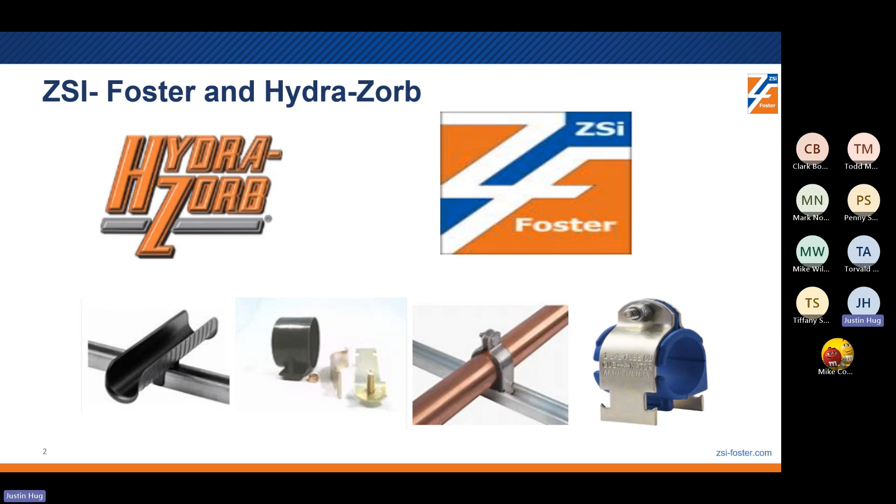They kept both names, although they approached the market a little bit differently. It made sense to keep both in the market under two different names, but as far as production and everything, it did move into one facility. So they had a couple good years, and it allowed them to move forward and really shift the company into purchasing Wesanco Strut, which is out in California on the West Coast. Then in 2019, they purchased Florida Strut, which is obviously down in Ocala, Florida. And then the third acquisition was Versabar, another strut manufacturer up in the Northeast.

So now you have a clamp company that has three different brand strut manufacturers, strut mills in the United States, with no real footprint in the Central. Although our brand is very, very good and well known, the Hydra-Zorb name is probably the best known. We are kind of shifting gears and trying to focus our marketing around one strut name and one clamp name.

It'll have a state-of-the-art strut roller mill. That mill will have very, very quick changeovers in die and tooling, so it'll do slotted, not slotted, long slots very quickly. It'll also do cut pieces very quickly off the mill.

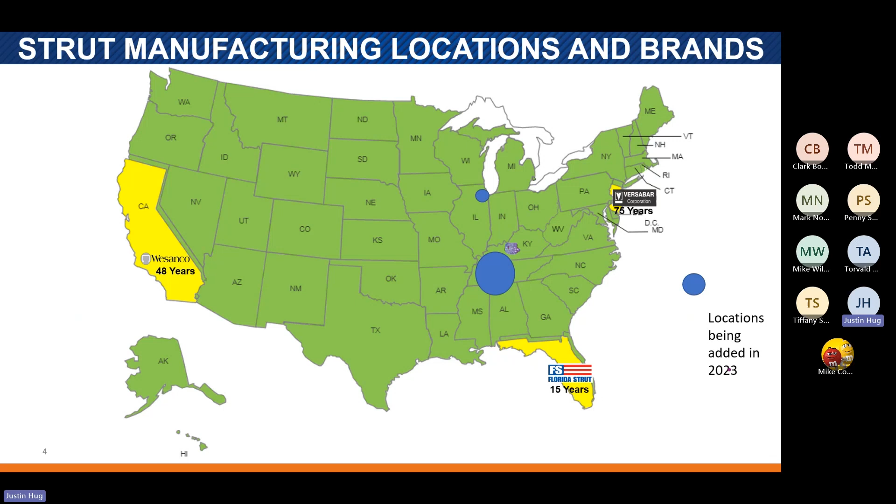We're still going to have ZSi as a name for the clamps, and Hydra-Zorb. Those are the names that you guys are using every day. But for the strut part of the business, we're going to go with the brand Wesanco.

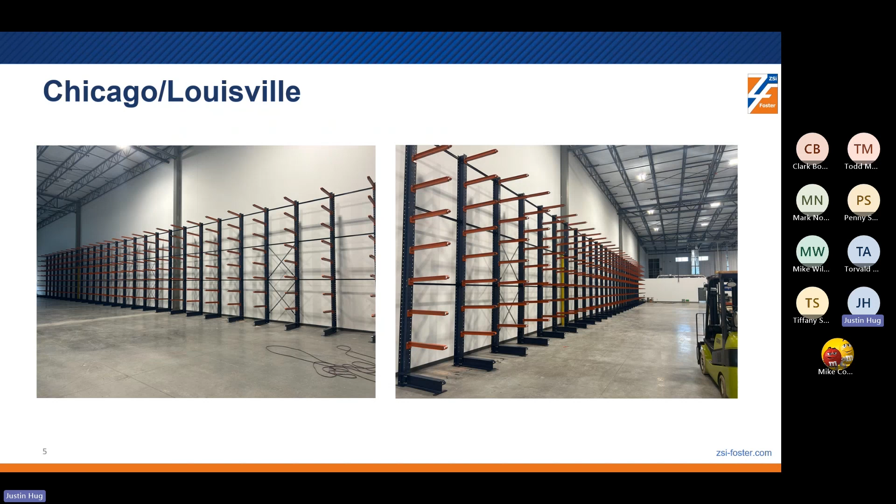These pictures are a little bit old now, but these are a little bit more exciting, taken about 2 months ago. These are the strut racks that we put up in Chicago. Louisville is very similar, obviously. I mean, those are massive, massive racks. So we put a ton of inventory, a ton of investment in there to help service the central.

Basically, everything that PM touches, these locations will definitely help service distribution in those markets. As you can see, we kind of pulled Florida Strut off that for a long time in my slide deck in the Carolinas, Alabama, Florida. That would have had the Florida Strut name. Definitely Wesanco is taking over, and that will be our strut brand name moving forward.

The Northeast still is Versabar, but we're hoping by January 1st that will be Wesanco as well. So when you're purchasing your clamps, your ZSi, your Cush clamps, Cush-A-Therms, know that the brand of strut that we will be selling to go with it is Wesanco.

I like to start off with that because there's a lot of confusion around who we are, and it's growing pains, right? As we've added these companies, it's definitely been a work in progress to kind of go to one name, one catalog, one part number. It sounds easy, but there's a lot of stuff in the background to make that happen. So it's good timing, crazy timing for us and growth, and we're looking to attack the market that way.

So why Wesanco and ZSI? We offer strut, channel strut accessories, rooftop supports - we'll talk a little bit more about that. We have a nice full line of spring steel fasteners, and we're getting ready to do some investments in there as well. Electrical raceway systems, full line of cushion clamps and insulating clamps and vibration pads. We do those very well.

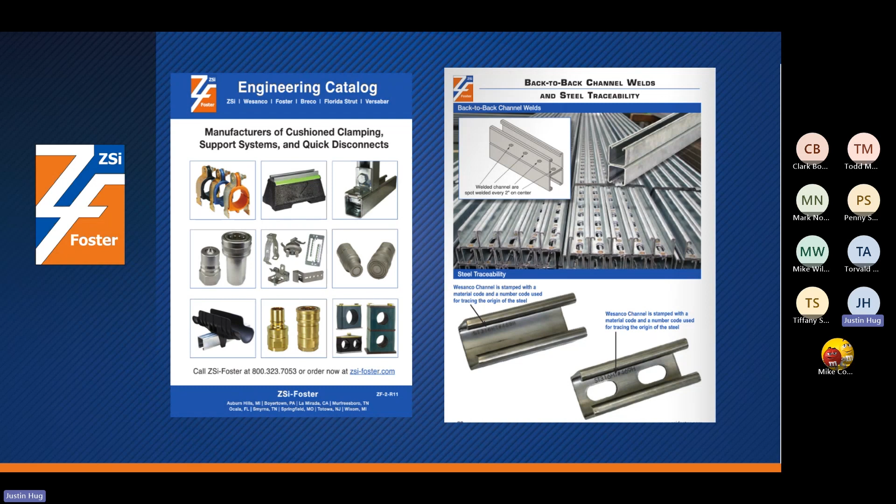That gives us a leg up on nuclear projects, some government type stuff. I mean, it is very, very important. I probably wouldn't have come to this company if they didn't do that. Really good strut providers do that. We compete against a lot of guys with import, low price stuff like that, and I can tell you that contractors, certain projects, this is a big deal to have that. And it's a big quality thing too, and accountability thing in the material that you're using. So we definitely do that - we check that box.

All the different flavors, if that's what you want to call it - your standard inch 5/8 deep, right? Everybody's going to have that. We do very well on back to back.

3 1/4, 2 7/16, 13/16, all the different heights, all the different combinations, side by side, back to back. We offer all of that, deep, shallow, mini. We have everything. We have knockouts, long slot.

It's a full breadth of product. And one thing I want to point out, at the right of the screen, is that we do something a little bit different: we actually catalog our pre-cut strut. We have existing part numbers, and we stock a lot of the common sizes, like in the inch and 5/8. We stock 1 footer, 2 footer, 3, 4, 5, and then it jumps to like 8. The part numbers are already made, and we typically keep 100 to 200 in stock just for when guys are in a pinch.

The big deal with the pre-cut is, if you have a contractor on site cutting strut anyway, buying 10 footers, 20 footers for big projects, you can target them. They're paying a guy to stand and cut that strut down to the trapeze size they need, 2 footer, 3 footer. They're going to cut it up anyway. There aren't many projects that actually install a 10 or 20 foot piece—they're all cut to size. So this brings a little bit of value. We get a premium, and you guys get to sell it at a premium.

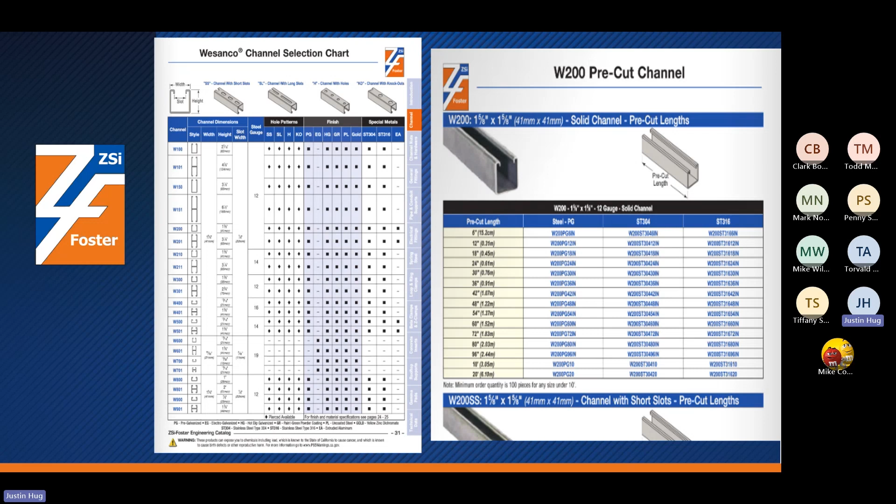We also offer all the different materials as well. We have stainless steel, 304, 316 on strut, fiberglass, green. A lot of guys still use the green. We offer green, we can do it in plain. Believe it or not, people doing painting or certain finishes don't want a finish on it, so we'll ship it in plain, or your everyday pre-galvanized. So all the different flavors.

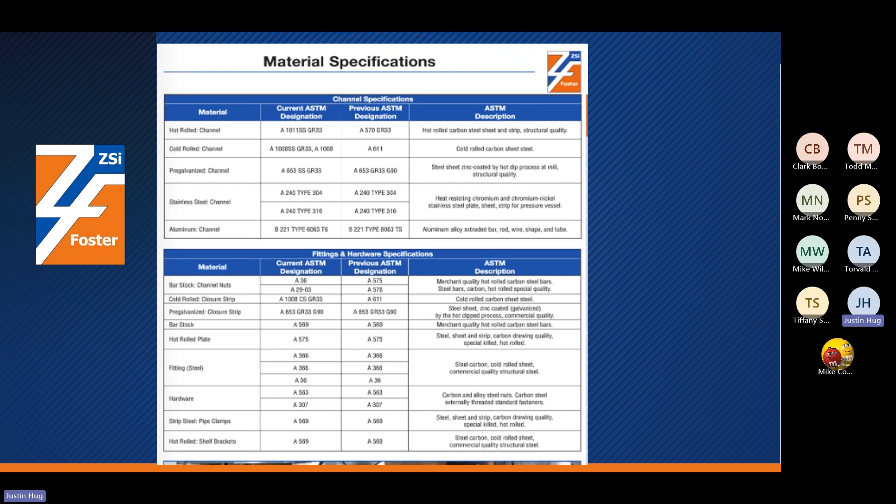And it goes for fittings too. Typically the fittings we have can match whatever flavor of strut you want. If you want green strut, green fittings, we can do that. If you want hot dip galv strut, we have hot dip galv fittings, and so on. Pretty powerful bandwidth of material.

We talked about the strut a little bit—we're the world leader in cush clamps. I'd say we probably own 80% of the market when it comes to cush clamps. We private label for 43 different companies. Typically, if you're buying a cush clamp, say from XYZ, we probably make them in Michigan, private label them, bag them, and ship them out. It's probably a high percentage that it's one of our clamps, rebagged private label.

So we're very, very good at cush clamps. We also have a big, wide variety of fittings, a full line of strut fittings—I know that's very important—utility brackets, and all the hardware: strut nuts, stud nuts, twirl nuts, all the different fasteners. Even down to different bolts, standard nuts, square washers, everything, we offer it. Specialty items too, I'd say rollers, concrete inserts, trolleys, and some cantilever brackets—we have that as well.

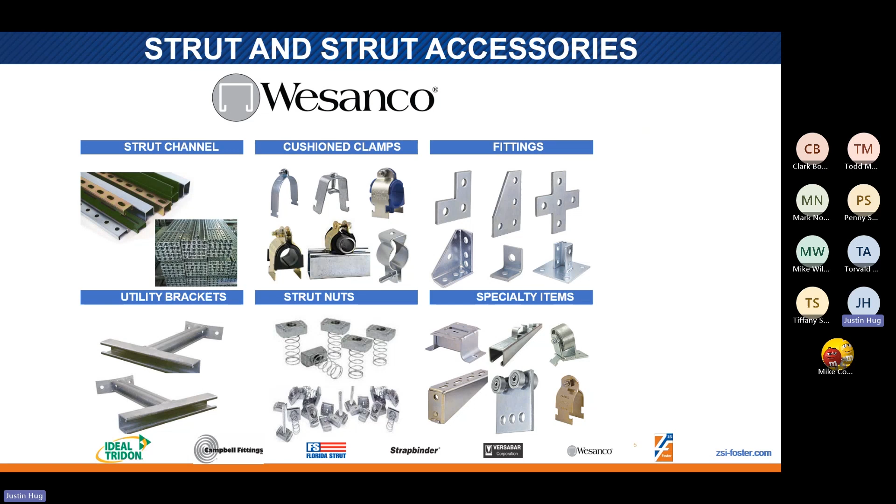Just a quick look at insulation clamps. We have the Cush-A-Therm, which is a very, very good product—allows you to insulate right up against and have a nice, clean place to mount the pipe. Cal-Clamps as well. Cush-A-Clips, which is just a smaller plastic clip-down clamp—it's nice because you can use those with insulation as well.

And then we're very strong on saddles. We have three different versions, though this only shows two: Snap-A-Saddle Pro and Snap-A-Saddle Multi, which is basically the same cup, and then the Value, which is a much cheaper shield. We offer a metal one as well. And then there's another one called the Bronco, pretty similar to the Snap a Saddle—we make that in house, we own the dies on that, and it's got a little bit better price point. So we have you covered on the saddles.

All those products' main goal is preventing condensation and protecting the insulation on a line—these are the products that do that. You'll see these used in grocery store applications, clean rooms, and even some data center type stuff.

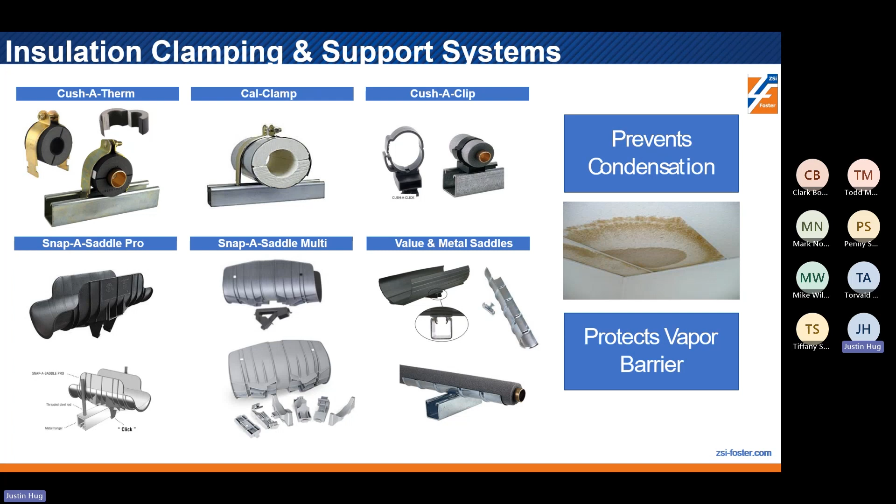And then we talked about these a little bit. We make all these in house, including all the dies for the inserts for the Cush clamps. Hopefully you can kind of see my cursor, but the standard Cush clamp, the second one I'm circling, is by far the most common.

A few years ago we came out with a Cush-A-Nator. I have a little bit of a video I'm going to show, a quick little video. I tend to push people toward the Cush-A-Nator for a couple different reasons.

You can see the three different colors. It has different temperature ranges, which is great especially for steam rooms. It has a built-in control squeeze that the standard Cush clamps don't all have in every size, where the Cush-A-Nator is always going to have a control squeeze. It also has a nice retrofittable capability, which we'll see in the video. It's really a cool product, has way more to offer than a standard Cush clamp, and it's pretty much the same price.

So there's Omega clamps, very similar, a one piece clamp with the insulation or rubber block in it as well. Alpha series, which is a U-bolt. The Cush-A-Claw, which I have one here next to me, I'll show you guys how cool those are. It's a neat, new product, UL listed, UV rated, plenum rated.

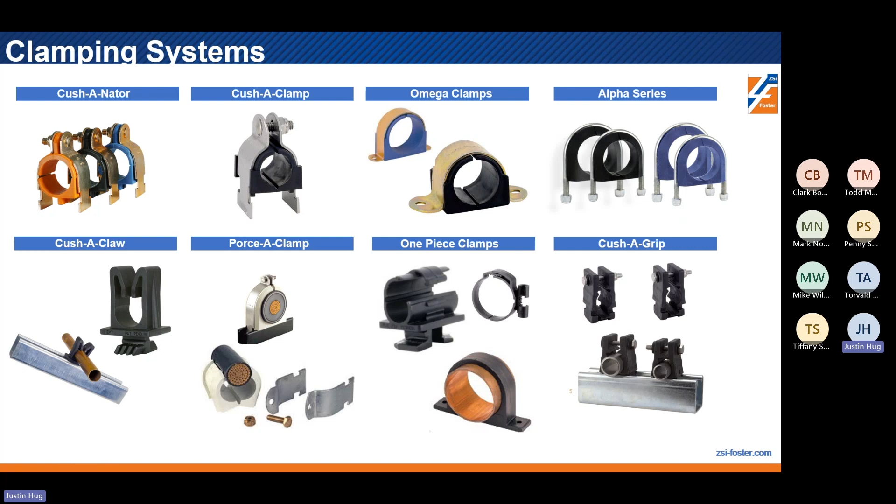It's just a really cool thing that we make. We actually make those in the States, in Michigan. It's a pretty little product, and I'll show you some advantages to that one in a second. There's also the Porce-A-Clamp, which is a little bit more on the electrical side, and then the one-piece clamps, the click ends, pretty self-explanatory. They're very inexpensive ways to retain or clean down pipe or copper.

So another new thing we came out with is the Strut Serpent. I'm pretty excited about this. I have a trade show after this, and I'm going to really highlight this one—it's going to be one of our big focus products.

We are owned by a company called Ideal. That's our mothership, Ideal Clamp, and they make like a million something worm gears a day. So obviously there's a huge advantage to us making this style clamp. It's made out of 301 stainless steel, installs very quickly, and is very strong on install. So it's really good for guys doing prefab who want to do some installing in the shop and then move the unit.

Typically it's going to hold down better than a two-piece strut strap, and it's also going to install a little bit faster too. This second video I have shows installing that. Having new products like this is a big deal because it gives you a couple different things—they bring a ton of value, they're very price competitive, they come in stainless steel, and it really gives you something of value to go in and talk to your contractors and distributors with.

So this is a cool one, and I'll show that video in a bit—it'll demonstrate some of the advantages of it as well.

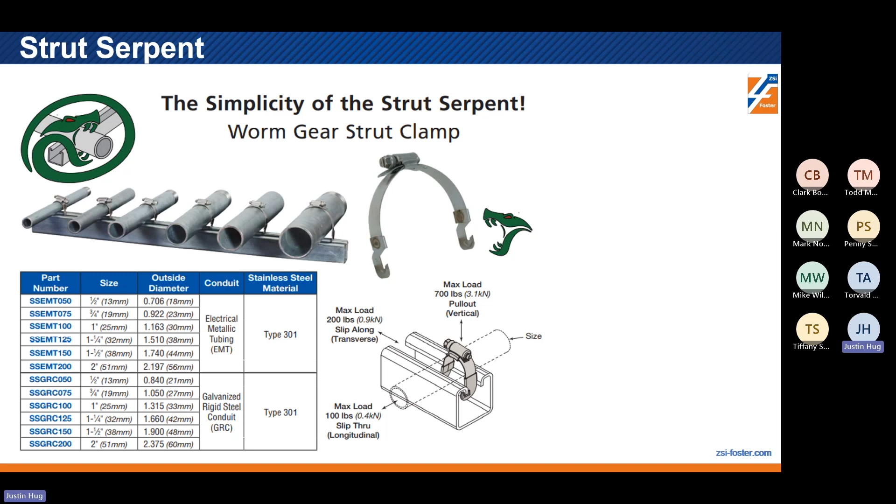Just to give you another picture of what that looks like—very similar to a Cobra clamp. It's where you're trying to outperform a two-piece standard strut strap. You just take it out of the box, it looks just like that, you hook it on and tighten it down. It doesn't matter if it's copper or conduit—in the picture it's conduit, but they work on copper as well.

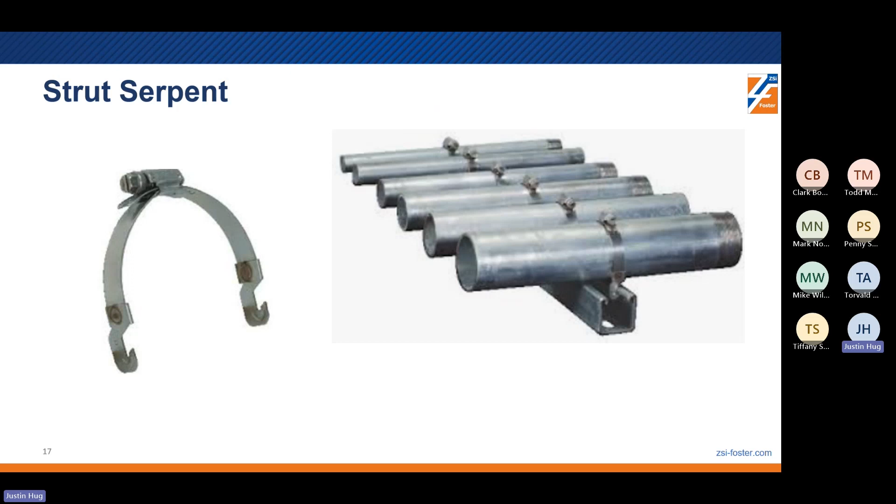Then I'll talk about rooftops to transition here a little bit. This is a picture I actually took this past weekend up in Springfield, in a hotel room looking down at the roof next to us. What you can kind of see is this electrical—I assume it's an electrical line in plastic conduit. These blocks at one point were screwed underneath, this one kind of still is, not really, to support that conduit run to be up off the rocks so that when it rains, it's not sitting down in the water.

Because it's electric, well, you can see over time what's happened—these 4x4s have floated away, they've flipped, they've moved, or they're missing completely. It's just not good, right? This is exactly what you don't want in your rooftop installation for any line, whether it's drainage, copper pipe, or electrical—it doesn't matter. This is why using wooden 4x4s is just not a good thing.

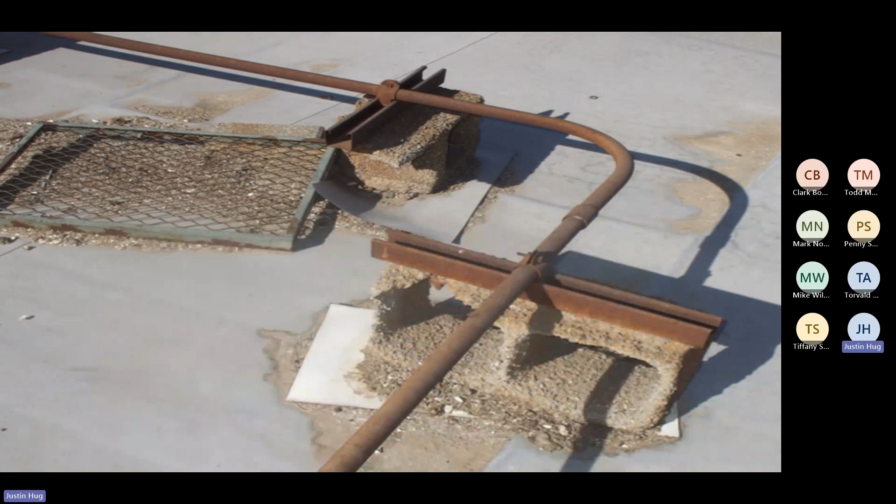Or this installation as well, right? Just terrible. If I'm a building owner, this is not what I want. None of these scenarios. That's kind of a joke, but that's basically what we're trying to do away with.

So we have, in my opinion, one of the best rooftop blocks in the market for a couple different reasons. We actually embed the screws. You can kind of see it in this mini block here. We embed the stainless steel nut into the block, so it can't spin, it's locked in there. That allows you to mount directly to the block, or you can get it with the strut mounted on top to do your runs and your lines.

So it has a great price point. It's made out of recycled tires, it gets you LEED credits. The green is actually a reflective stripe baked into it when they're making it, so it has a safety play for early morning or late at night. A guy's up on a roof, doesn't see a black line, he's got a flashlight, it'll give a reflection. The other cool part about these is they play for almost every industry. It doesn't matter whether it's electrical, HVAC, plumbing, mechanical, they all use rooftop blocks. So it's a great product across the board.

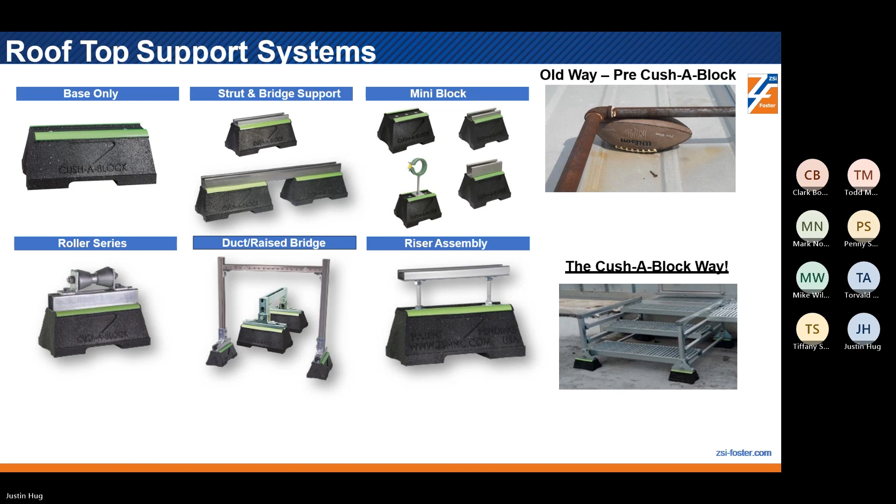We have a new block called a biggie block, and I have one sitting next to me. I'll show you guys just how big it is, but it's great because of the load pounds, it really mounts stuff down nicely. The pattern on it allows for post bases or strut to be attached directly to the block. The nice thing about it is transition, so you can have equipment running one way, two directional. It just gives you a little more opportunity to mount stuff directionally up on a roof if you have crossroads or intersections than you would with a typical rooftop block.

So again, you get LEED credits with those as well. This is a new product, there's not a lot of competition on these. Very heavy duty rooftop guys, it's a big one for those.

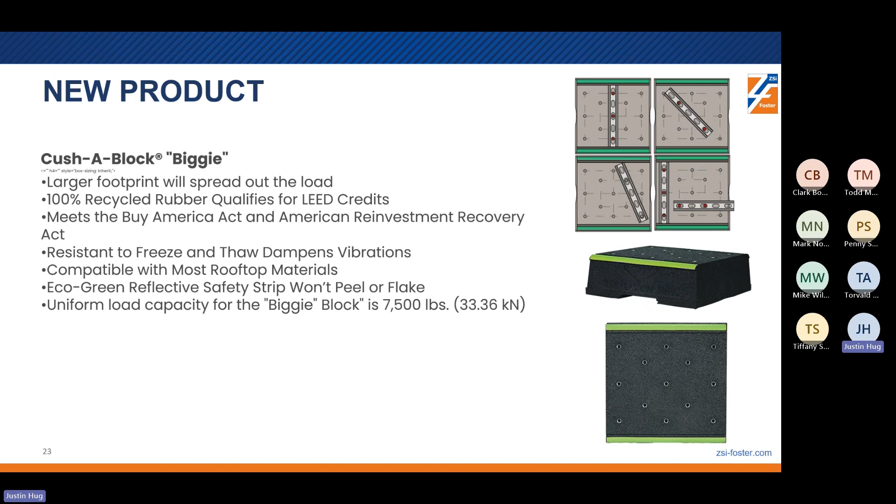We have samples for everything that I'm showing you guys. You can take that email down, we can request samples from there. So samples aren't just for new products, we can do samples on anything you guys need to see.

I realize there's some big names out there, B-Line, Unistrut, Haydon, some of those guys. We are definitely an up and comer when it comes to strut manufacturers. So if ever a contractor or distributor wants to see some material, ping me, let us know. We'll gladly send any samples needed, let them check out our strut and our quality.

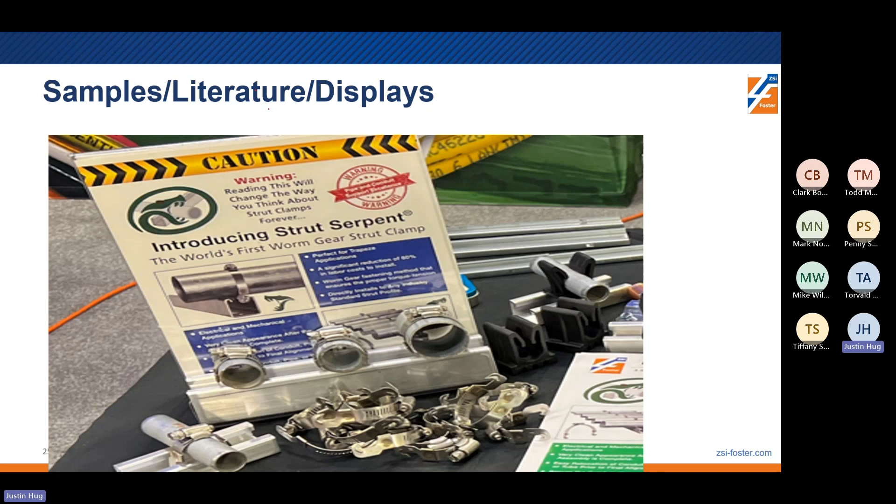Here's just kind of what some of the counter displays look like. This is the one for the strut serpent. I apologize for the picture being a little blurry, but nice little counter displays. They show good at distribution. They come with catalogs as well, so the backside actually has like a little one-page flyer to hand out. So good on the display stuff.

So I end with this slide. This is definitely a strut application. I like it because it's comical, yet it has all different kinds of strut fittings in the background. This is actually out in Disneyland in California, about 10 minutes from our strut facility there. So there's a very, very high probability that this strut and strut fittings is Wesanco brand. So glad to show that.

And I'll open it up to any questions.

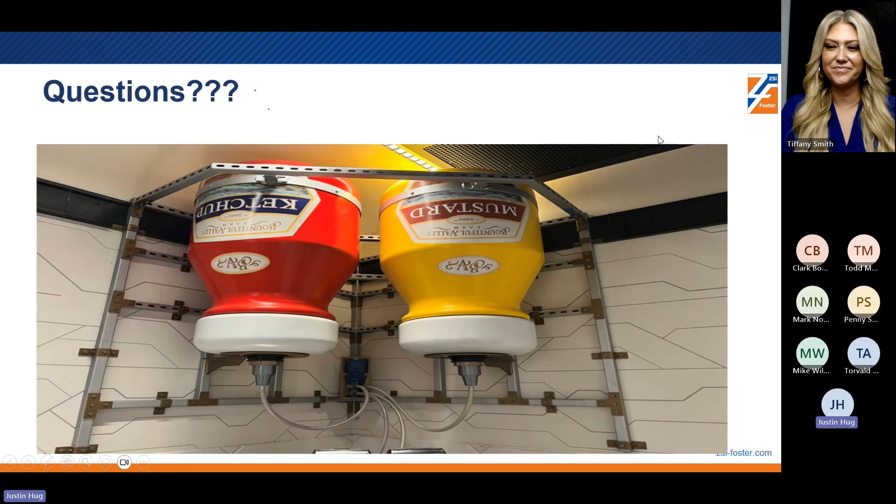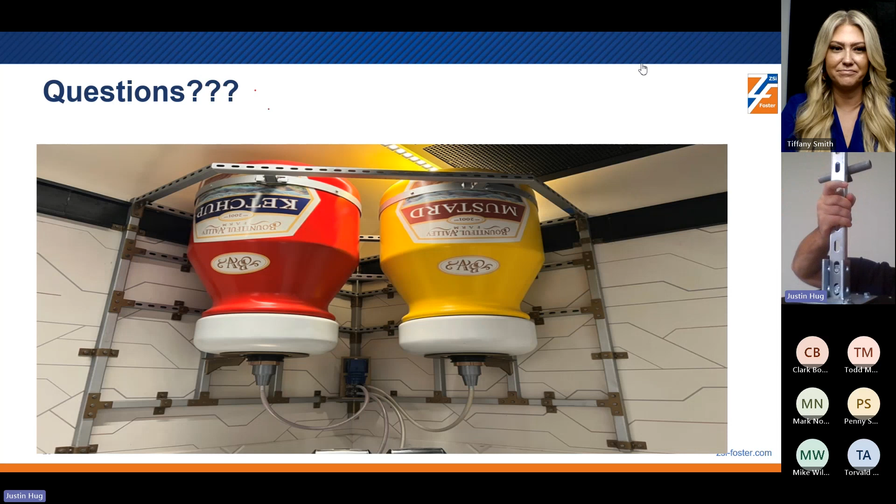I'll just show everybody how big that biggie block really is, how heavy. I got a post base mounted to it, and a piece of strut. I'm going to go do a trade show after this, and this will be a highlighted product. So it really is a biggie block.

Let me unmute that for everybody. The cush clip is the claw as well, so you can see it's just this little bracket here. It's a quarter turn in, and then it doesn't matter if it's a piece of conduit or pipe, it just snaps in that easy for that application, or if it's on a trapeze, it obviously retains it like that. So I expect those to be very, very popular. They have a really good price.

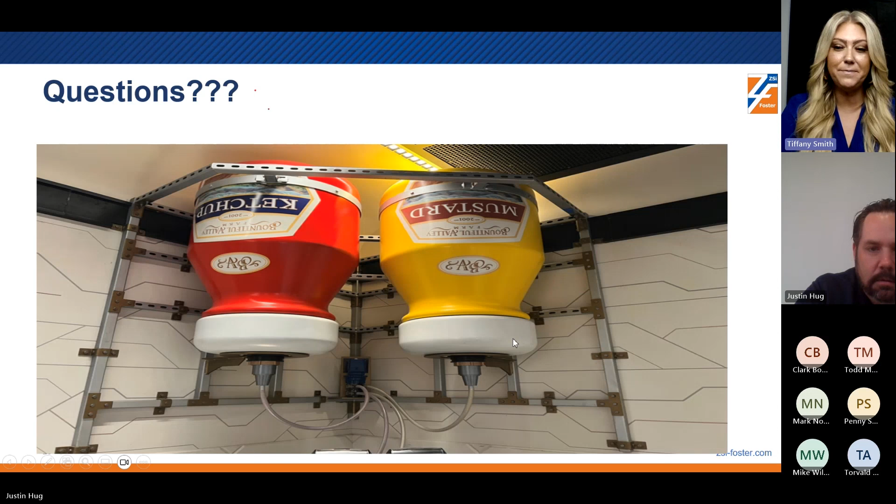Hey Justin, Todd Morgan, how are you man? I'm good, how are you? Doing wonderful, thank you. Thanks for the webinar man, that was very good and informative.

I know this is a popular question - how are we on Clevis? So we have a plan for Clevis hangers. I'll be completely honest, it's not moving fast enough. I know that the guys you're in front of every day are buying Clevis. That's part of the reason why we brought in Chris Seacheck to help establish that. He's wrapping up the Spring Steel Fastener strategy right now. We have some Clevis, and we're good on servicing some things, but your big day-to-day Clevis guys, we're not quite there yet. No worries though, we're probably still able to sell. Probably 6 to 8 months to have a stronger focus around pipe hangers, Clevis.

Okay cool, that's a great question, and trust me, it's one I bring up weekly in my what-I-need email to my boss. Thanks for the update - for me, right, because in the past life I came from, it's like peanut butter and jelly, you gotta have them both. But right now we're really trying to make sure we have our peanut butter correct and strategy around that, which we do, and then we can start looking at different jelly. Sounds good, thanks man.

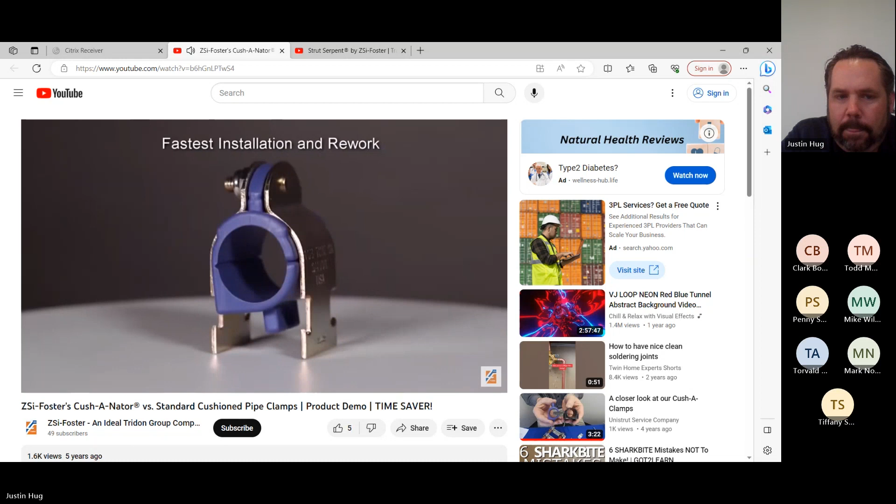I can talk through it as well. So what they're doing is like a retrofit - if they're changing out a line or doing something differently, with traditional style clamps you have to completely disassemble them. If you wanted to get to the one in the middle, you can't, like if it's on a multiple trapeze line, you can't change those out, you can't roll the new insert in. This shows you how you don't have to disassemble any of the rest of the line if you need to just add one clamp. Very, very flexible. And you can't over-tighten it, because hopefully you can see my cursor, that insert in the middle allows you to have a controlled squeeze on that every time you install it. Making the different colors is the biggest part, and you have different temperature ranges as well.

Now let me transition over to this one.

Okay Tiffany, can you see - it should be a caution, the little warning thing on it. I can, yep. So this one's the strut serpent. They're going to show you the difference between the installation of a two-piece clamp and using the serpent. One thing to note - it doesn't matter whether it's copper or conduit, it's how much closer you can get using the serpent versus putting side by side with the traditional two-piece.

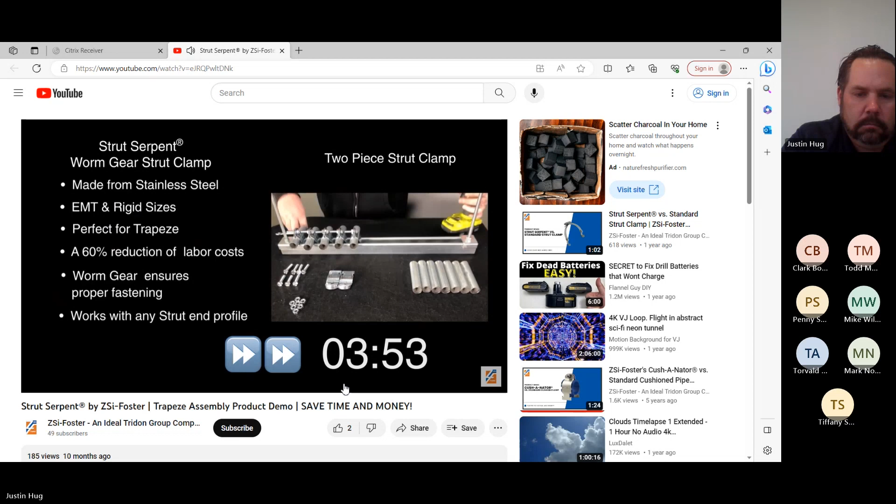Install, so that's all I have, Tiffany. If there's anything else, any other questions, let me know. Thank you so much Justin, this is a fantastic presentation. I'll open it up one more time for any more questions.